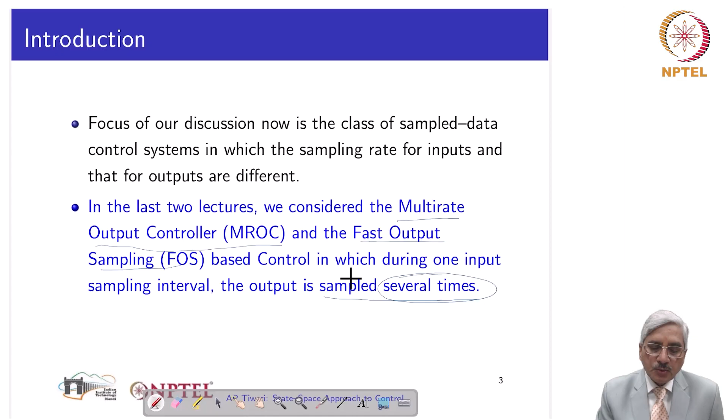In the previous two lectures, we considered the multi-rate output controller, abbreviated MROC, and the fast output sampling based controller, or the FOS controller. In both of these, the rate of sampling the output was faster compared to the sampling rate for the input. So during one sampling interval corresponding to the input, the outputs were sampled several times during that. These two controllers we discussed, the MROC and the FOS.

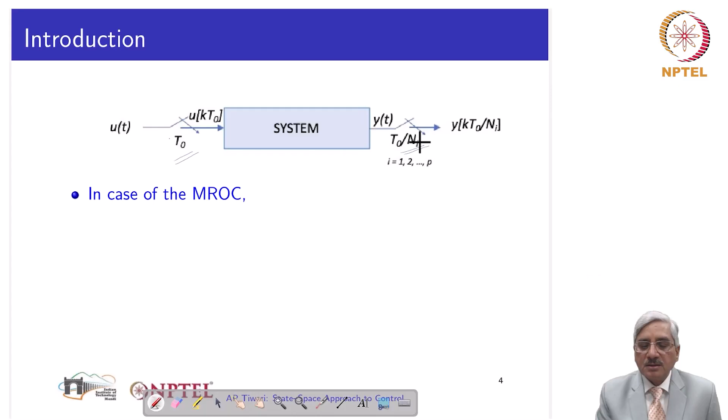In case of MROC, the input sampling rate is T0, the output sampling rate is T0 by N1, T0 by N2, etc. The control system is a dynamic control signal computed using the previous value of control signal and the multi-rate samples of output. This is just a recall. So MROC was characterized by this, that it is a dynamic controller.

The value of input at k plus 1 T is dependent on the previous value of input and again multiplied by the samples of output. And sampling rates of different outputs were different. So output 1 was sampled at T0 by N1, output 2 at T0 by N2, and so on. So in the multi-rate output controller, the output sampling rates for different outputs were different, allowed to be different.

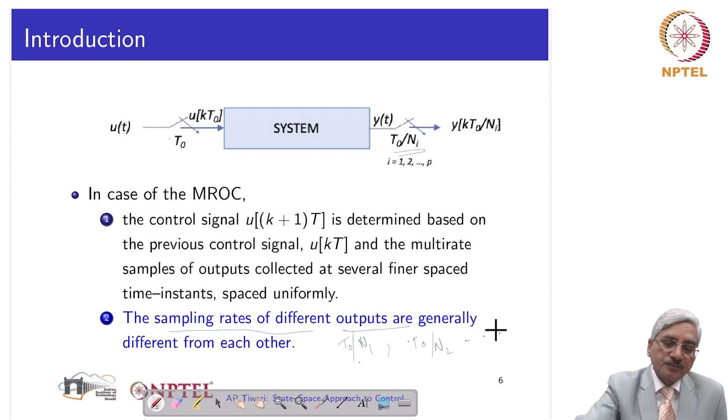Then we discussed the fast output sampling based controller. This is very similar and can be regarded as a special case of multi-rate output controller. In this one, the input signal is computed based upon the control signal, and in this case it is non-dynamic, it is static. So previous control signal, that knowledge is not required. It is calculated based on the samples of output collected a number of times during one sampling interval.

So several finer spaced time instants, at those instants the outputs are collected and from that the input is generated. The only difference from MROC is that the output samples are taken at the same rate for all the outputs. In MROC they were N1, N2, N3, etc. Here it is N for all the outputs. All outputs are sampled at the same rate, N by T0.

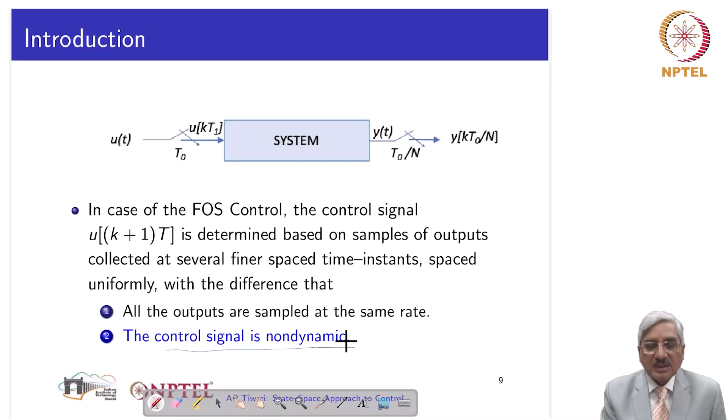If T0 is the input sampling rate - again there is a misprint here, it should be UK T0, I'm sorry for this misprint. So that is in what sense FOS and MROC are different. And of course, as I told, the control signal is non-dynamic in case of the fast output sampling based control.

Remember, in fast output sampling, the input samples were collected at larger intervals of time t, and the outputs were sampled at the rate delta. However, in periodic output feedback, the input is updated several times during one interval t. So the distinguishing feature of periodic output feedback controller is that the output is sampled at a slower rate 1 by t per second, and the input is sampled at a faster rate 1 by delta per second, and delta is t by n.

N is an integer which is greater than 1, of course. So the inputs are sampled at several uniformly spaced instants of time during one output sampling interval. This is one feature. Other thing is that control gains, we'll see, I will explain this, they are periodically varying. That means control gain at some time is equal to the control gain sometimes in the past, and it will repeat again and again. I will show with the help of the mathematical expression.

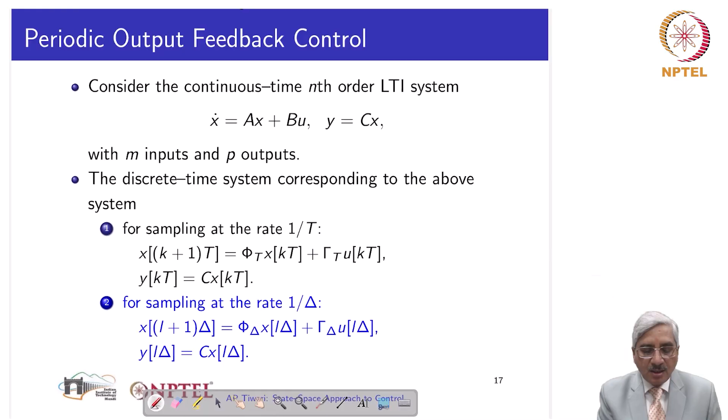And we have its corresponding discrete time system for two sampling rates, one sampling rate 1 by t and other sampling rate 1 by delta. Recall that phi(t) is e power At, and gamma(t) is the integral between 0 to t of e power A tau times B d tau. Similarly, phi(delta) and gamma(delta) can be given - in place of t, we will have delta. That is the difference. So we have the same continuous time, linear time invariant system, and we have the corresponding discrete time systems for the two sampling rates, one 1 by t and the other 1 by delta.

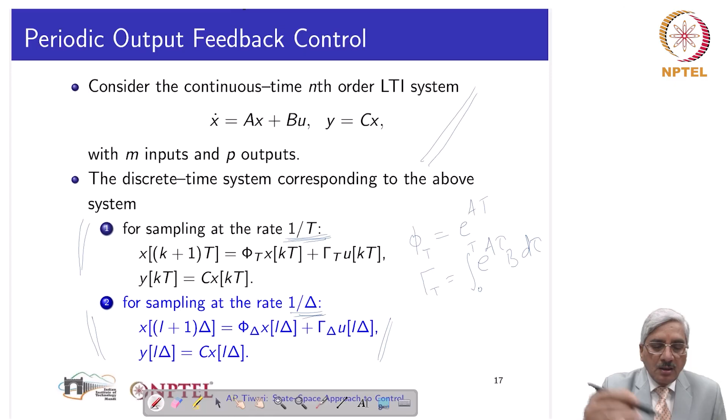The output sampling rate is 1 by T per second, which is divided into n sub-intervals, each of size delta. So basically this is T, this is kT, and this is k plus 1 T. This is one sampling interval of output, divided into subintervals each of delta, so this is kT plus delta, this one is kT plus 2 delta, and so on, up to kT plus n delta, and because delta is T by n, so it is k plus 1 T.

So in one sampling interval of output, we have agreed to divide and obtain n subintervals, and at the end of each subinterval we will change the input. The input between kT plus L delta and kT plus L plus 1 delta is given by KL times YkT. YkT is the output collected at this instant, which multiplied by KL is the input during this period.

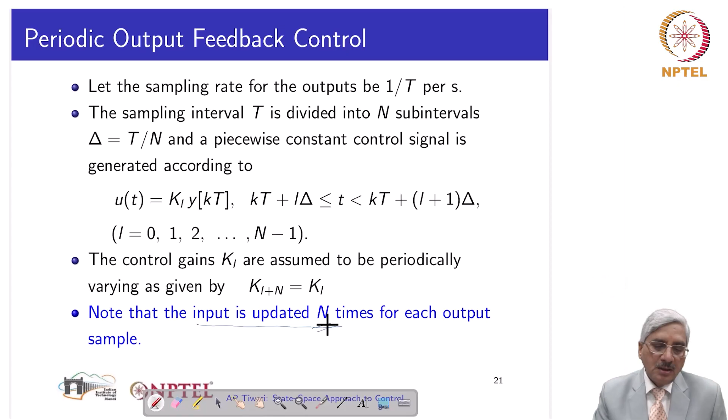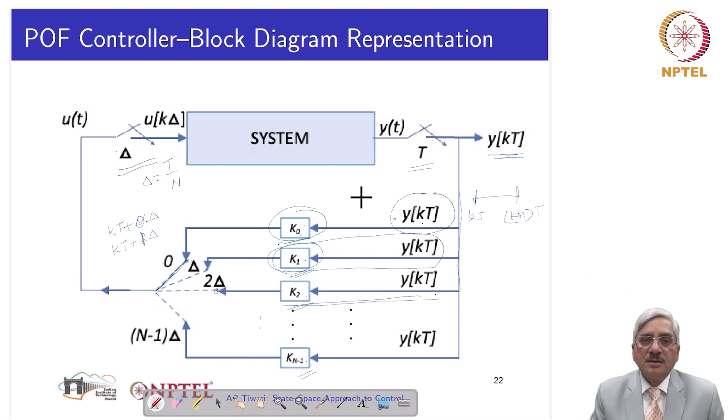This is periodic output feedback, and periodic output feedback and fast output sampling feedback controller can be considered as dual of each other.

Now we derive the expression for periodic output feedback control gains K0, K1, etc. We start with the state of the system at different subintervals. Consider the value of state at Kt plus delta: it is Phi delta times the value of state at Kt, plus Gamma delta times the input at instant Kt.

The state of the system at Kt plus delta is given by this expression. At Kt plus 2 delta, the state will be Phi delta into the state at the previous instant, considering time instants separated by delta subintervals. So Phi delta into x at the previous instant plus Gamma delta u at the previous instant. We substitute this expression into the previous one to get this result.

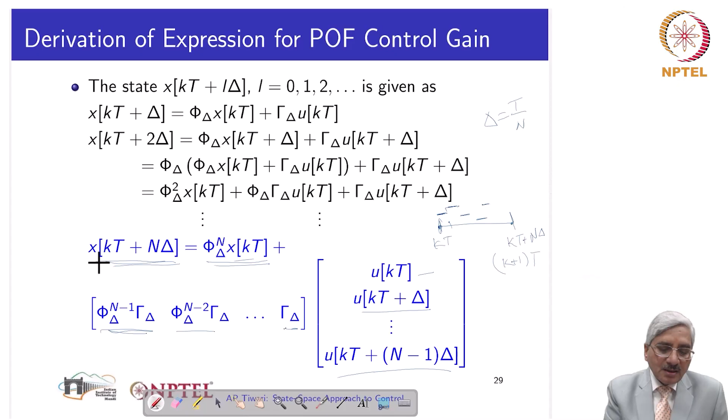So the state here will be given by Phi delta to the power n into x, plus terms involving Gamma delta into u at Kt, u at Kt plus delta, and so on. These input values are generated from the sample of output at Kt, multiplied by K0, K1, K2, etc.

Once we obtain that, the input is K0 times Y at Kt, so it is K0 times C x at Kt, since Y equals Cx. At the next sub-instant, Kt plus delta, u will be K1 times Y at Kt, so K1 times Cx at Kt. We are considering the output at the Kt instant only, so Y at Kt is the same as Cx at Kt. Thus u at Kt is K0 Cx at Kt, u at Kt plus delta is K1 Cx at Kt, and so on.

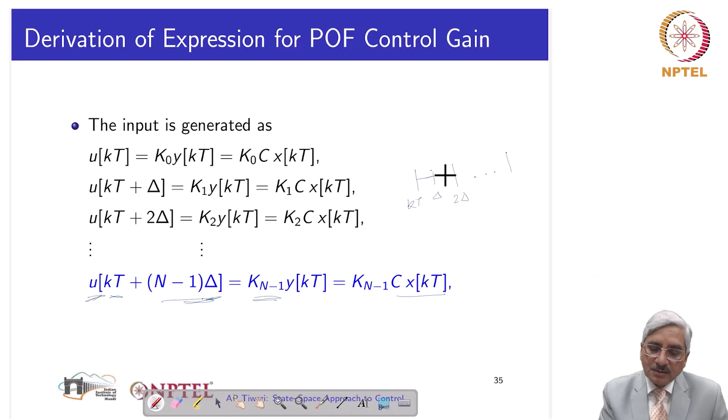The next input will be K2 times Cx at Kt. In this manner we continue, and we have the input in the last subinterval: from Kt to Kt plus delta, Kt to Kt plus 2 delta, and so on, up to Kt plus n minus 1 delta, which will be Kn minus 1 times Y, that is Cx. So we have the values of input during these subintervals of time.

Based on these, we can have x at Kt plus delta from x at Kt, with this value of input, which is Y, multiplied by Gamma delta. So we get x at Kt plus delta, and similarly x at Kt plus 2 delta, and so on. In this manner, we get x at Kt plus n delta given by this expression.

Now we start taking a look. This one is containing phi delta x k t. This one is containing 2 delta here, so phi delta square. This is n delta here, so phi delta power n. This is only delta, so it is gamma delta into k0. Here 2 deltas are there, so gamma delta k1 and gamma delta k0. Here n are there, so we have gamma delta k0, gamma delta k1, and so on, gamma delta kn minus 1, each one pre-multiplied by phi delta square, etc.

This is essentially coming from here, coming from these expressions. So the moment we write what are that gamma and k, it will be clear. Gamma is that matrix: gamma delta, phi delta gamma delta, phi delta gamma delta, and so on, phi delta power n minus 1 gamma delta.

So these products assembled together, all these columns assembled together, is the boldface gamma, and k is those gains, k0, k1, etc., that set of n gains. C is the output matrix. So this follows from the previous slide. From these expressions, those come.

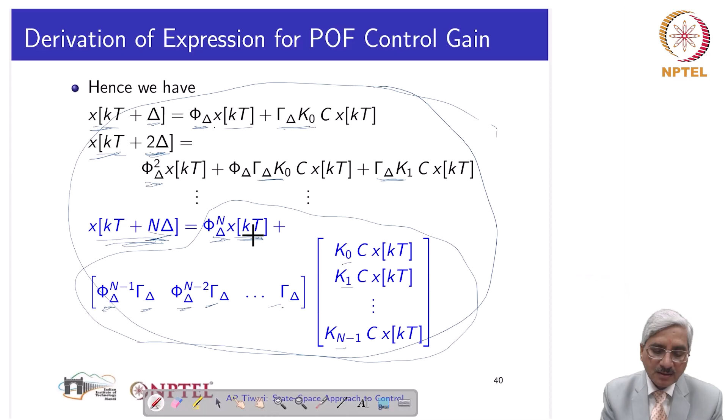X k plus 1 t is x at the preceding sampling interval at the rate 1 by t multiplied by phi delta n, and then this product. This is this. This is this.

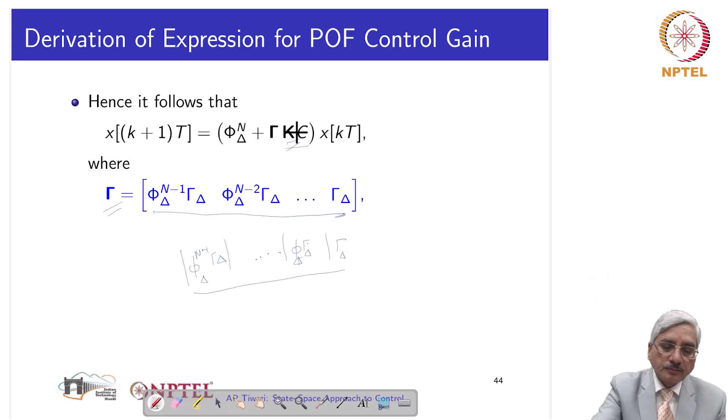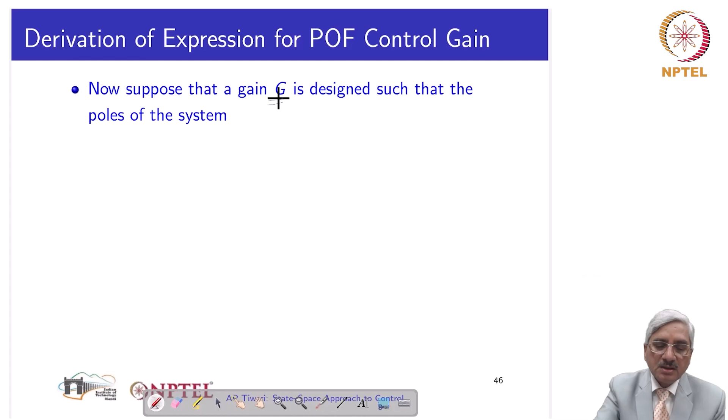Now at this point we hold the equations there and we think of a gain G in phi t plus gc, such that this phi t plus gc system will have desired pole locations in the unit circle, because we are talking of discrete time system, so we are talking of unit circle in the z plane. So we assume existence of a G for the system phi t c.

It is not phi t gamma t, please mind it. Phi t gamma t is coming from the state equation. Here it is c coming from the output equation. So we take phi t and we take c and we assume that there exists a G such that this system will have desired pole locations.

Of course, this is same as phi t transpose plus c transpose g transpose. So if we consider the dual of the system phi t gamma t c, and for the dual system, phi t transpose and c transpose are considered respectively as system matrix and the input matrix, we are designing a controller g transpose, which will be the gain.

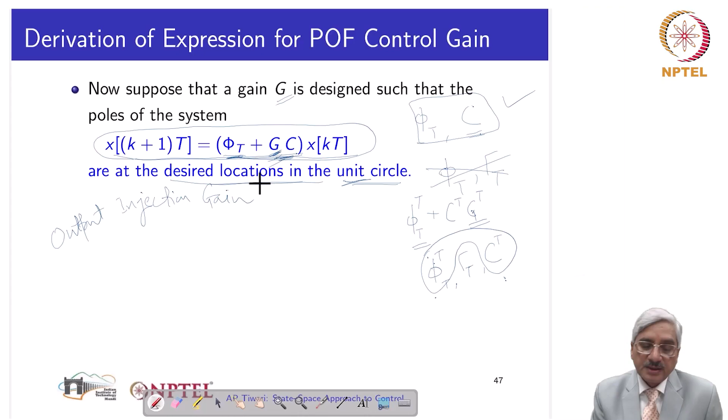So in this case we call it as an output injection matrix, output injection gain. So we design a G, the output injection gain G, such that the poles of this system will be at the desired locations in the unit circle. That is done. And of course we have this relation, phi t is same as phi delta power n.

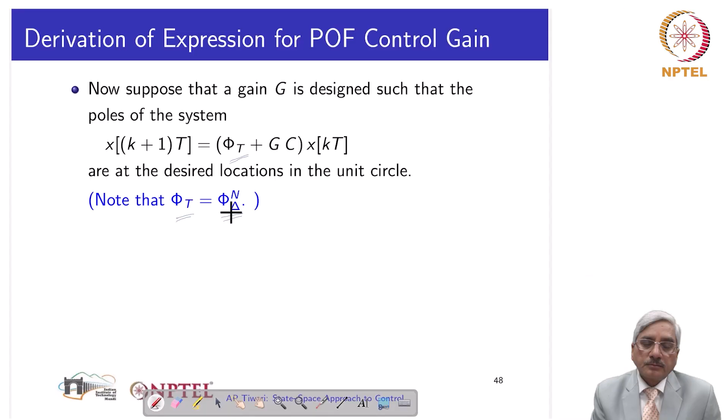So we compare this system which we obtained in one of the previous slides and this closed loop system with phi t substituted by phi delta power n. And we see that the two systems will be same, behave similar, meaning the state at next time instant will be the same if this matrix and this matrix are equal, meaning that gamma c, gamma kc and gc should be equal, and that means gamma k should be equal to G. This is the expression for the periodic output feedback gain, and this should be solved to get k. And of course gamma is this.

So we can immediately see that this matrix will have full rank if n is greater than or equal to mu, and mu is the controllability index of the system, meaning that phi delta mu minus 1 gamma delta, phi delta mu minus 2 gamma delta, and so on, gamma delta, this rank equal to rank of phi delta power mu gamma delta, phi delta mu minus 1 gamma delta, and so on, phi delta gamma delta, gamma delta.

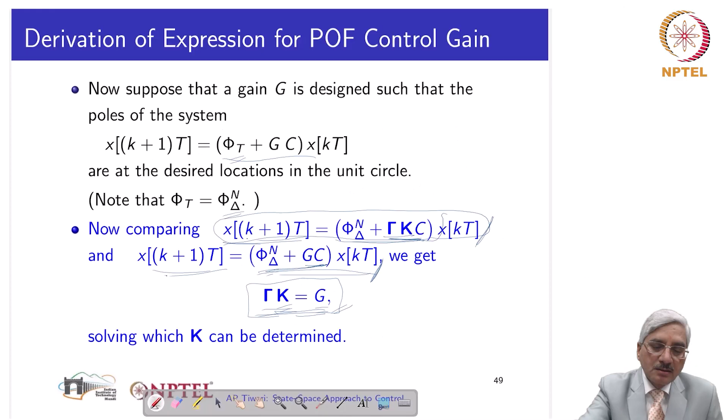It is. So that is one thing. And how we can obtain G? G can be obtained if phi t transpose C transpose is controllable, or if phi t C is observable.

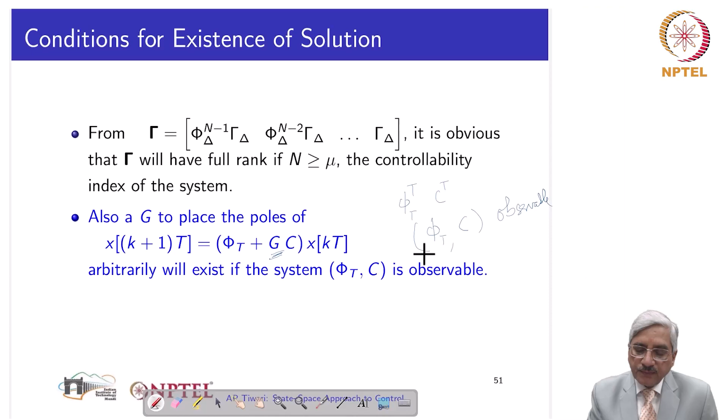If phi t, C pair is an observable pair, then G, the solution of G, can be obtained. G can be designed either by pole placement method or by linear quadratic regulator design to obtain the poles of this system at the desired location, or to optimize a cost function. Whatever way, a G can be obtained if this phi t, C is an observable matrix, an observable system.

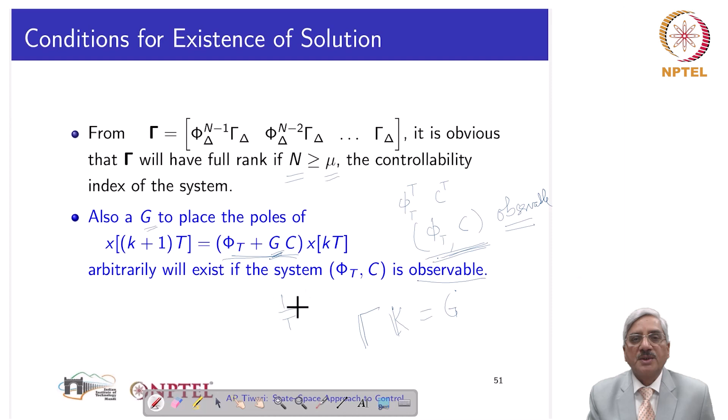So the solution to gamma k, this bold gamma k equal to G, will exist if n is chosen to be larger than or equal to the controllability index of the system, and if the system sampled at the rate 1 by t is observable. In that case, gamma will exist. This is summarized here: the sampled system should be controllable and observable, and the number of subintervals in t should be larger than mu, the controllability index. Then the solution will exist.

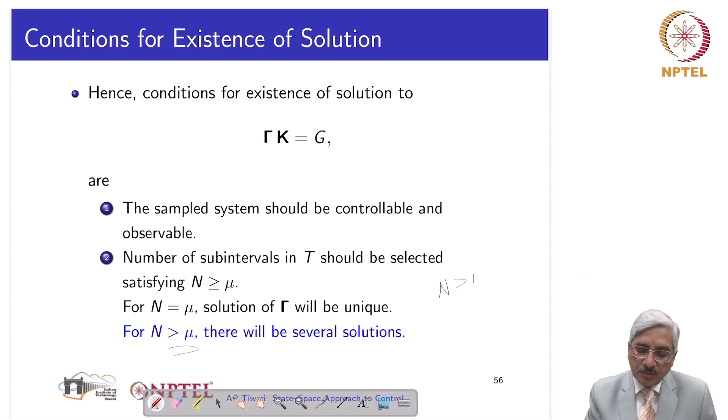Now there are two possibilities. If n is exactly equal to mu, then the solution will be unique, because gamma is inverted: the number of unknowns equals the number of equations, and gamma has full rank, so its inverse will be obtained. So the solution of K will be unique. However, if n is larger than mu, then some of the gains K are to be assumed, since the number of equations are fewer than the number of unknowns, giving extra considerations in the periodic output feedback gain design. So some K are selected differently, and the remaining are solved from the equations. In this manner we can solve for both n greater than mu as well as n equal to mu.

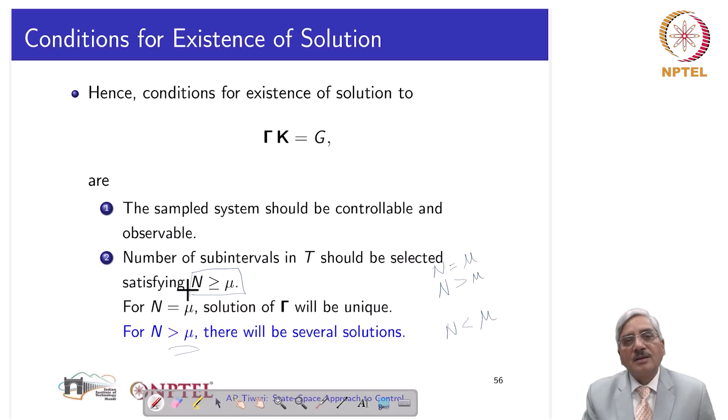Solution will not exist for n less than mu. We are constrained to select n greater than or equal to mu. Now we see, with the help of the same example, the fast output sampling based controller.

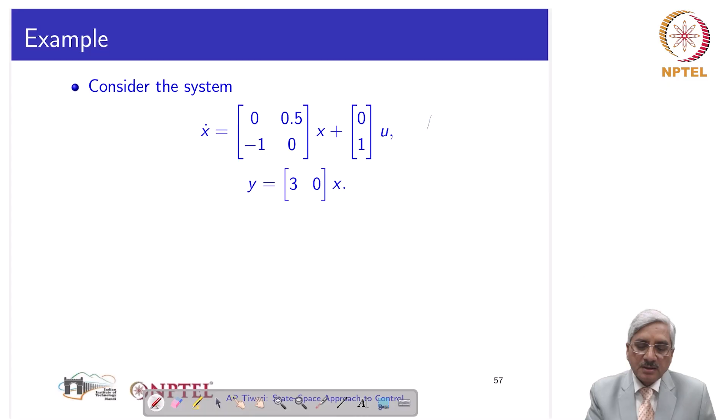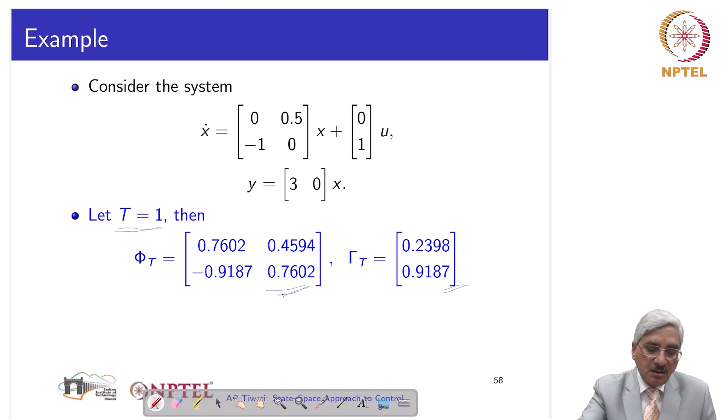We consider that system. When discretized for sampling period equal to 1 second, this gives the state transition matrix, the system matrix, and this input matrix, phi t and gamma t. Using this phi t and this C, we can design a G, and we see that this G places the poles of phi t plus G C at these two locations in the z plane. Both of them are less than 1, so the system is stable. It may or may not satisfy some transient performance characteristics, but just for the purpose of demonstrating the design of the periodic output feedback controller, we consider G to obtain these pole locations for phi t plus G C.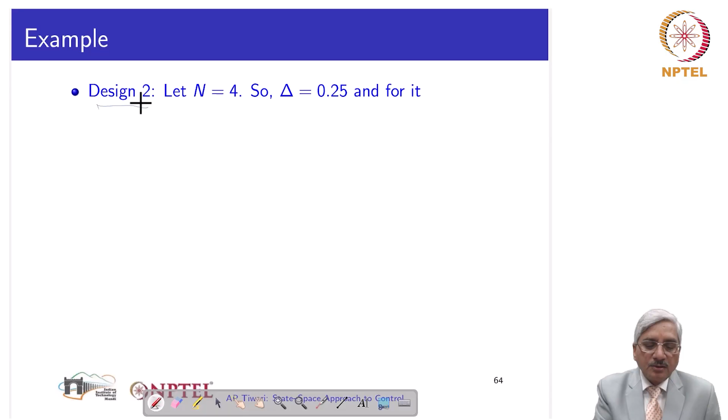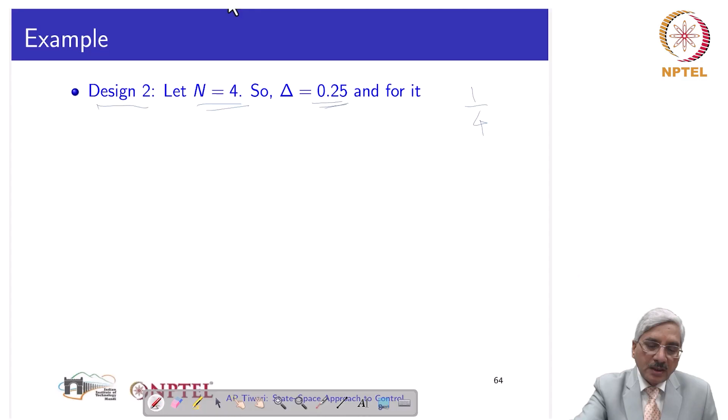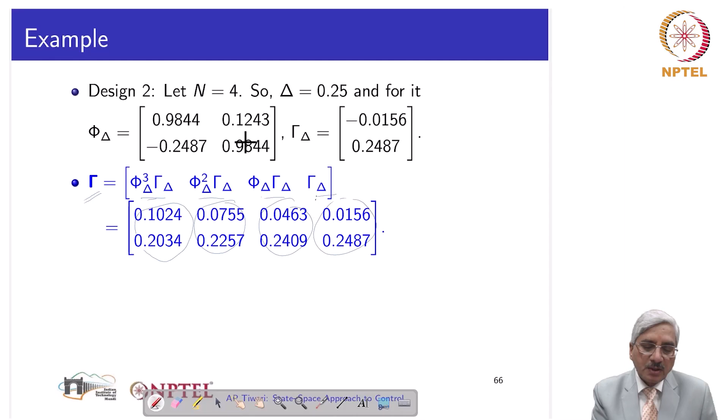We obtained that. Now we consider another design in which we select 4 subintervals into one output subinterval, so delta is 1 by 4, or 0.25, and for this we have this phi delta and this gamma delta. G is the same. This bold gamma now has 4 columns: gamma delta, phi delta gamma delta, phi delta squared gamma delta, phi delta cubed gamma delta, and these 4 columns are these. This we obtain from this phi delta and this gamma delta.

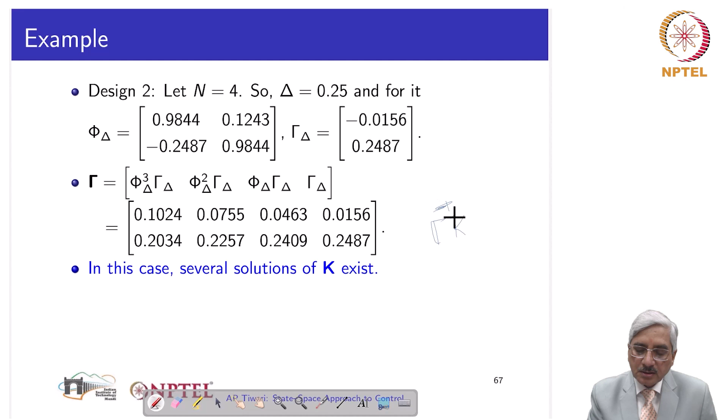Now if we evaluate gamma K equal to G, the solution to this, gamma is now a rectangular matrix, so several inverses are possible. So what we do is, this K, which will now have 4 elements, K0, K1, K2 and K3, we can select any 2 out of these, and the remaining 2 we can determine. In this case, K2 and K3 were selected, and K0 and K1 were obtained by solving the equation gamma K equal to G.

So basically, if this is gamma 1 and this is gamma 2, and if this is Ka and this is Kb, then gamma 1 into Ka plus gamma 2 into Kb equals G. In this case we assumed Kb, so gamma 2 Kb is known, and that is subtracted from the right hand side.

So G minus gamma 2 Kb is equated to gamma 1 Ka, and so Ka is obtained by gamma 1 inverse times G minus gamma 2 Kb. This Kb was assumed. So out of 4 unknowns, since we had only 2 equations, we assumed 2 and evaluated the remaining 2 from those equations. We could have chosen any 2, or chosen different values of these 2 itself.

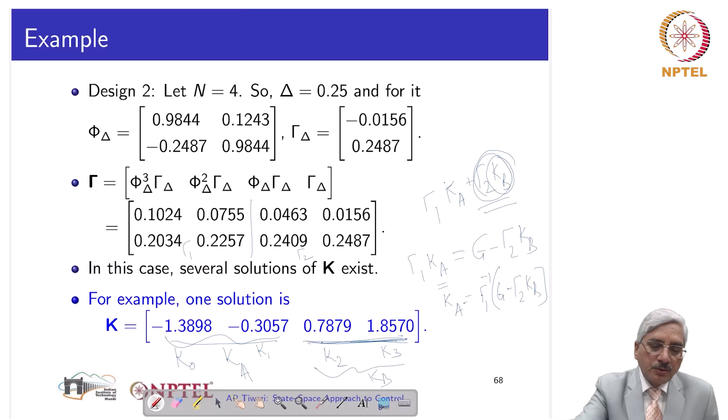Now we summarize. In periodic output feedback, the input is updated several times during each output sampling interval, and any output injection gain can be realized. Poles of the sample data system for the sampling period T can be placed at any arbitrary locations as desired, and here also an observer is not required.

So we conclude this multi-rate sampling controllers topic with 2-3 more observations. First, we considered MROC, multi-rate output controller, in which each output could be sampled at different rates and input was sampled every larger interval T. Then we considered the fast output sampling controller, where each output is sampled at the same rate n by t. Here it was n1 by t, n2 by t, etc. for different outputs, but in fast output sampling, for all outputs the rate is the same, n by t.

And then we considered periodic output feedback, which is dual of fast output sampling. In fast output sampling, the output sampling intervals are smaller; the output is sampled several times during each sampling interval of input. In periodic output feedback, the output is sampled at larger intervals of time and input is sampled several times during one sampling interval of output.

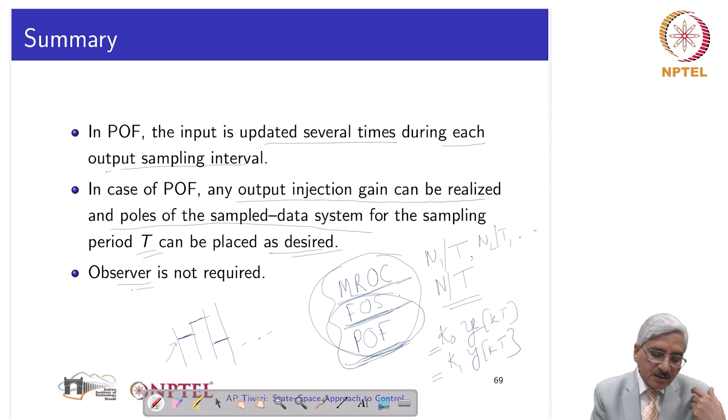Also, correspondingly, the values of states at x(kt+delta), x(kt+2delta), and so on will show a lot of variation, and of course the specification of output at y(kt) will be satisfied. So one observes that in case of periodic output feedback control, the response of the system at the output sampling intervals is very smooth. At the sub-intervals, there can be jumps in the control signal u(kt+delta), 2delta, etc., as well as in the values of the states. So this may not be desirable in certain situations.

Otherwise, periodic output feedback controller is the simplest of these three, and multi-rate output controller is the most complex. All three, of course, are implementable through the use of digital control systems, discrete sample data control systems, and by incorporation of digital computers in the loop.